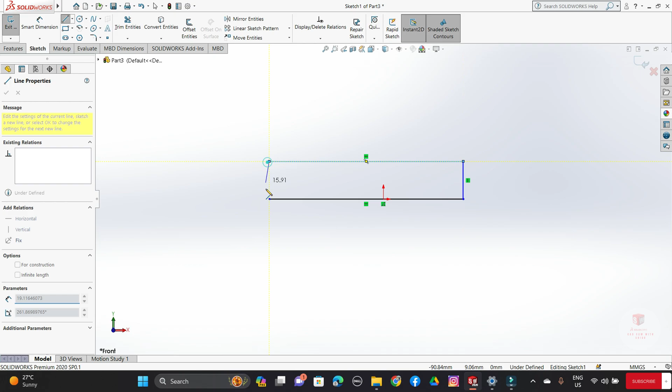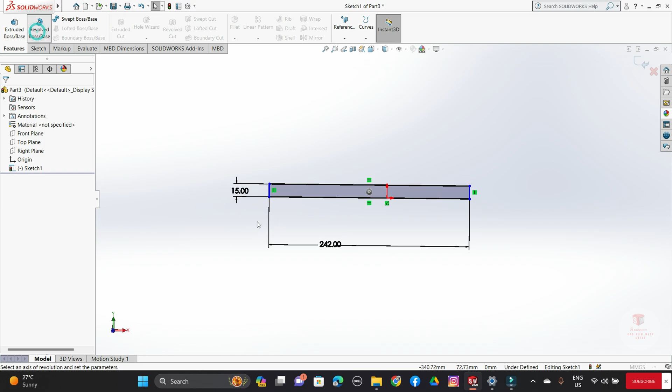Then dimension will keep, length will keep 242 mm. Then width dia is, it will be 30 mm, so we'll keep 15. Features, select this line. This is our roller.

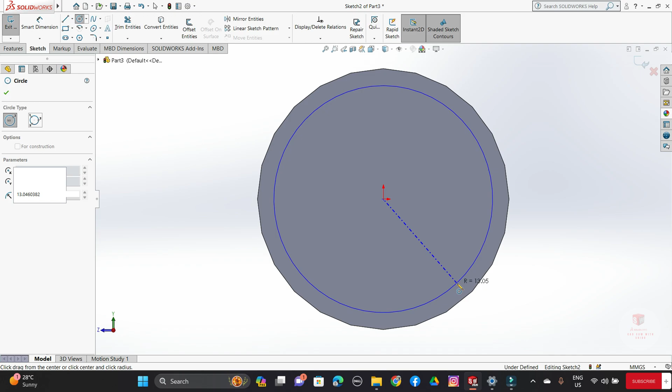Then we have to cut the hole for this shaft. Sketch, normal. Select the circle, make a circle, and I will keep 20 mm. So 20 mm, this hole for the shaft. Extrude cut.

So now we have to Through All. Select here, Through All.

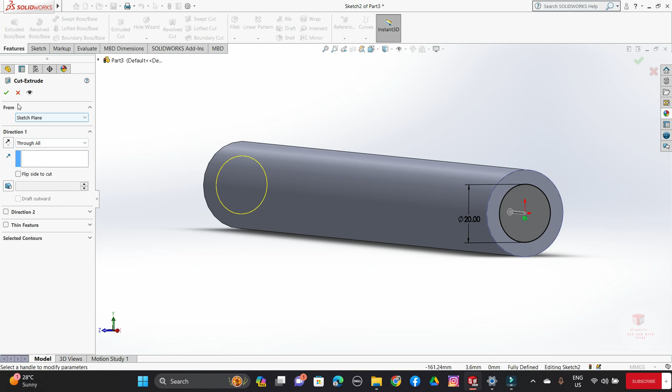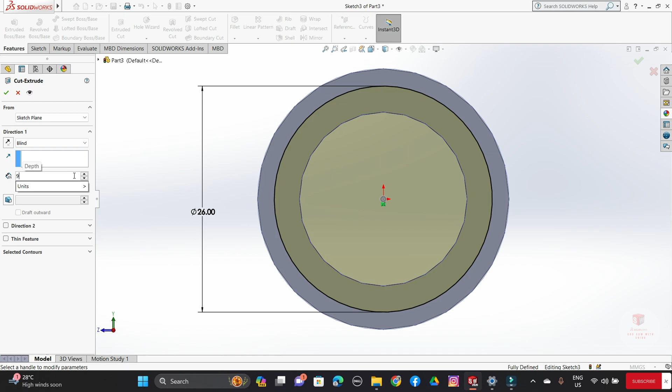Now we have to cut a step for the bearing. Sketch, select the hole. So here we will use bearing 6000, so outer dia will be keep 26, so small dimension 26. Now again extrude cut, then we'll keep around 9 mm. So first step is complete.

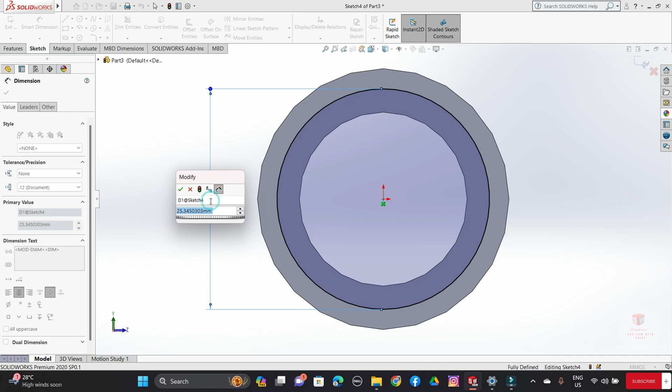Select this edge, sketch, normal, circle, 26. Cut 9 mm. So our shaft is ready.

Sorry, roller is ready. So 1 minute, quality higher.

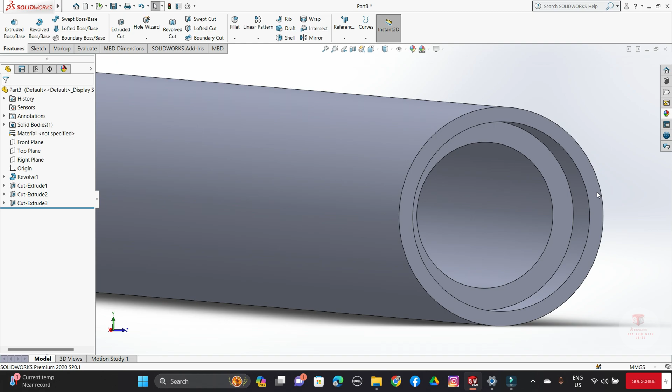Our roller is ready. Just select the material.